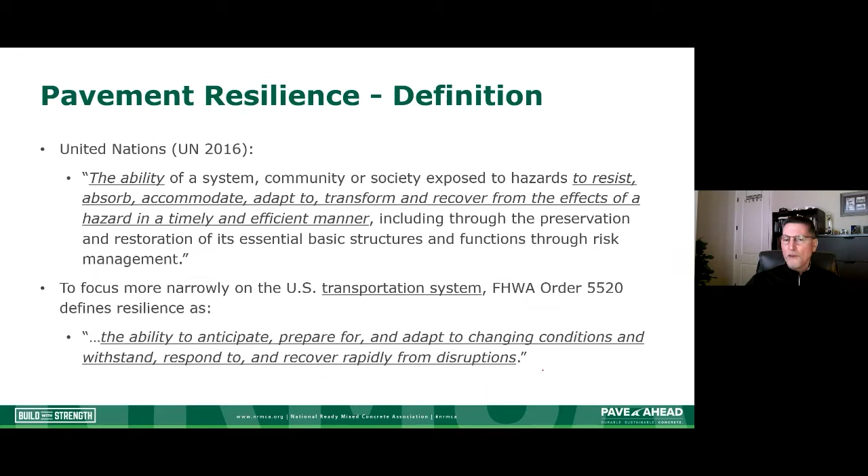So it's: you have a disaster of some sort, a hazard of some sort, and then you respond to that, and how quickly you respond really defines how resilient that asset or structure is.

So that's resilience. When we talk about sustainability, we're talking about the pavement's ability to achieve some sort of engineering goal for what it was constructed for. And hopefully what we can do is preserve and maybe even restore some of our surrounding ecosystems through the construction of that pavement, and use our financial, human, and environmental resources economically.

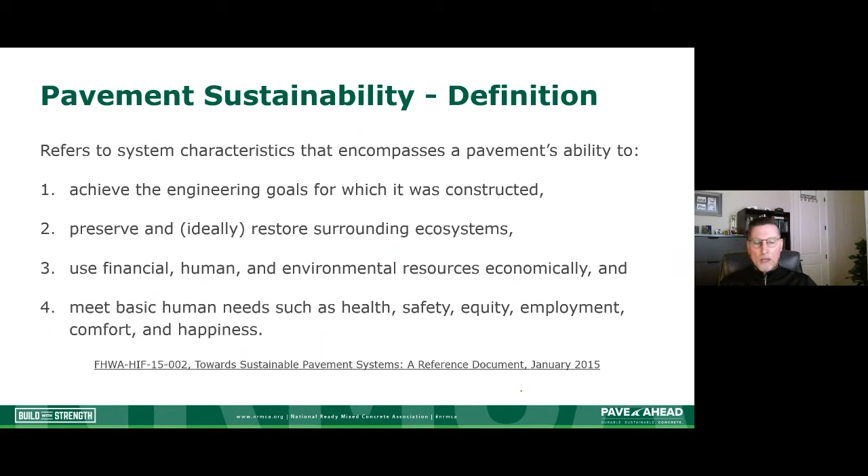That's the triple bottom line we talk about: the social, economic, and environmental. We also want to make sure we meet basic human needs such as health, safety, equity, employment, comfort, and happiness. So that's what I'm going to claim sustainability is.

Now, when we talk about sustainability, we're talking about broad impacts. We tend to think about sustainability in terms of our greenhouse gas emissions, right? So we think of it here: CO2 equivalent or carbon burden, that type of thing.

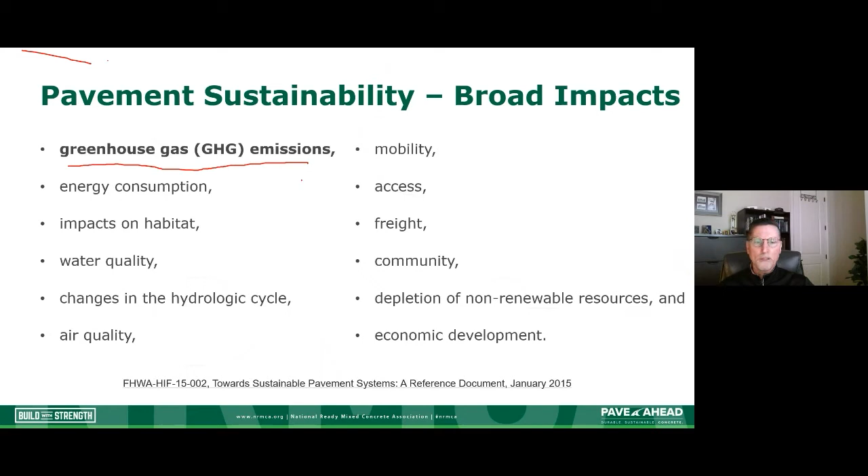What does our infrastructure, our pavement, how does that impact us environmentally? We tend to always think about greenhouse gases, but there's a lot of other things sustainability can mean: how much energy consumption, or am I saving energy in some way with that asset? Does it impact habitat and water quality, or that hydrologic cycle of rain absorption, evaporation, that type of thing? Am I impacting air quality or community mobility by adding a pavement or a lane? That access to the rest of the community, how we move freight — all of that can also be an impact when we talk about sustainability. So just keep that in mind as we go through.

Now, the one thing I want to make clear is that sustainability and resiliency are not the same thing. They can be compatible, but they're not necessarily equal. And what does that mean? Well, remember resilience is that ability to respond to some sort of a hazard or a natural disaster.

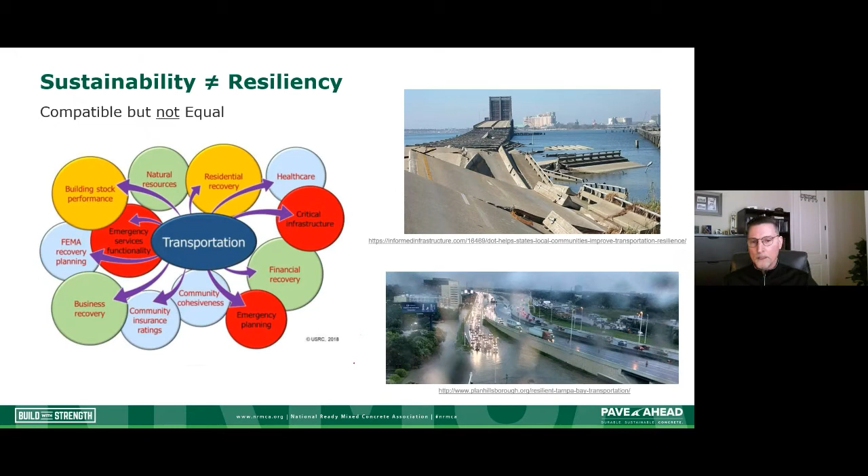We can build a pavement that is very resilient, but it may not necessarily be very sustainable. So we need to understand that sustainability and resiliency can kind of co-live together. But just because we build something sustainably does not mean it's resilient, and vice versa. When we build something resilient, it's not necessarily sustainable. So those two things are different, can be different. They can be compatible with one another, but one doesn't mean the other is going to occur.

So let's talk about resilience a little bit, get a little bit deeper into what it means, but also when we're talking about how do we design and construct resilient pavements. Resilience is that ability to anticipate, prepare for, and adapt, and then withstand, respond, and recover. So if we have some sort of an event that occurs, we will lose performance.

We'll lose the ability for that asset, for that infrastructure, for that pavement to perform adequately. So there will be some sort of a recovery time, and then we'll kind of be back either near or at or near our performance, or maybe even above our performance prior to...

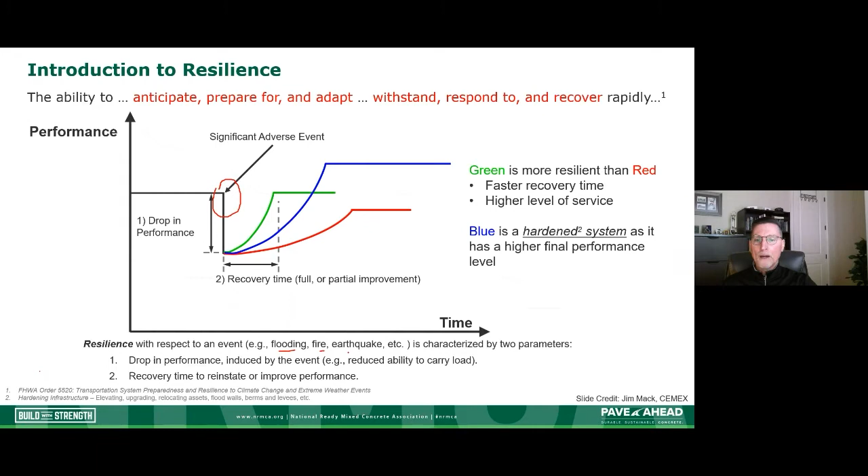The green shows, well, we in fact recovered quickly and we're at that same performance. Now, we can actually build structures to where they will rapidly recover, and maybe even by what we do during that recovery period, they may be even better in terms of performance than they were before. And when we talk about an event, what we're talking about is something like flooding, maybe wildfire, earthquake, that type of thing.

So when we're talking about impacts to pavement, climate impacts, what do those impacts entail? That can entail temperatures. What we're seeing with climate change is higher average temperature, higher extreme maximum temperatures, warmer extreme minimum temperatures. So we're not getting as cold, as severe cold. And then maybe more freeze-thaw events, particularly in areas where we tend to see significant winters. What we may see is more freeze-thaw events that occur in those regions.

When we look at precipitation, we may have higher than average precipitation over time, maybe wetter winters, drier summers, low summer humidity, and more extreme rainfall and flooding. We talk about extreme events like droughts, floods, wildfires.

What can that do? Well, it can affect subgrade moisture, particularly when we talk about droughts. We can have a decrease. What we may see with flooding is a more frequent roadway inundation. So they're flooded, the substructure of our pavements is flooded.

And then with fires, we may see more in terms of frequency, and also larger in terms of size wildfires. We've seen that here the last few years. And then we also can maybe have sea level rise, where we see more frequent roadway inundation as well.

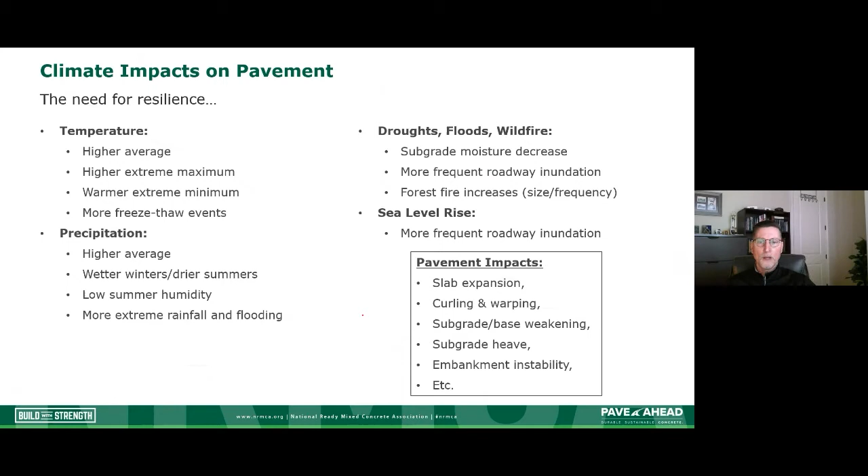When we're talking about pavements, the most significant impacts to our pavements, whether they're roadways or airports or intermodal facilities, whatever, we typically are seeing that flooding is our most significant risk to our pavements. Things like tornadoes and wind, drought, heat, wildfires, while they may have some sort of an impact to the pavement, really when we talk about operating cost and the funding gap that we have in terms of keeping our infrastructure at a certain level of performance, flooding really is the big issue, the biggest risk.

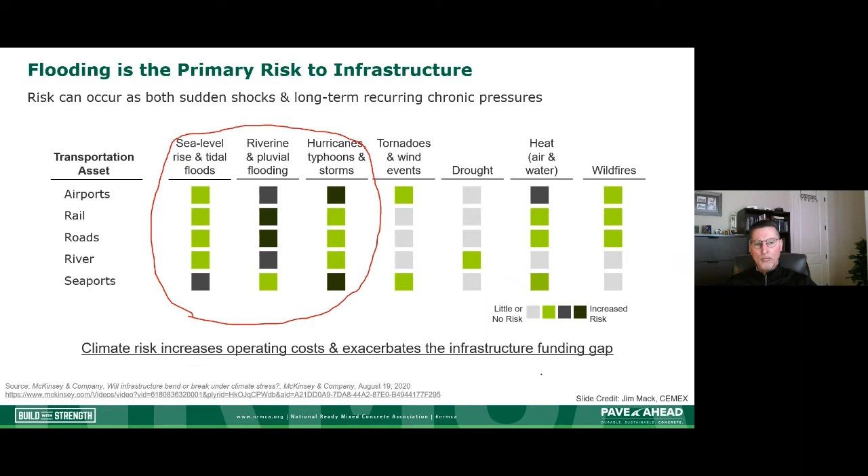And there's three different types of flooding. The first would be severe flooding from natural disasters. Think of our eastern coast, think of the Gulf Coast, and particularly Houston. Houston, over the last several years, has had several significant flooding events, the worst being Hurricane Harvey. So we have hurricanes, we get tidal rise, we get significant rain, and we have flooding that can occur, and our pavements can be flooded and inundated for a very, very long time.

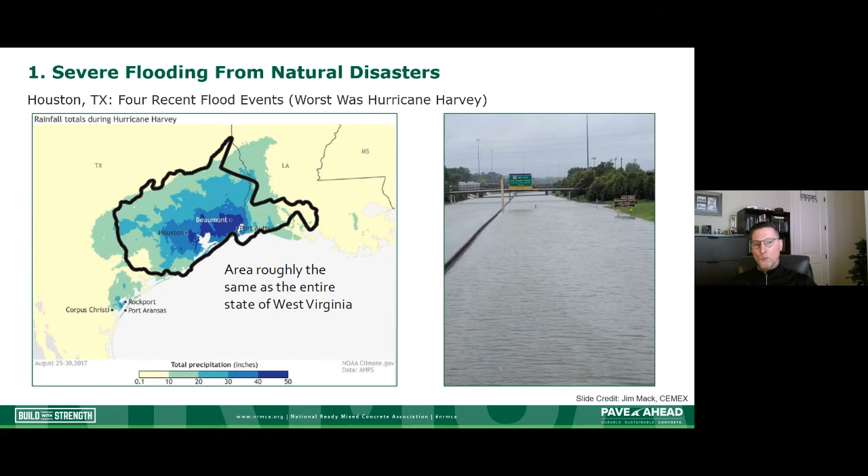Sometimes it can be weeks. And when we have that, we have a reduction in strength of our pavement, typically below the surface. Another way flooding can occur is in the Plains States. We may see significant river flooding going over the embankments during the snow melt, the springtime. So we can have significant flooding.

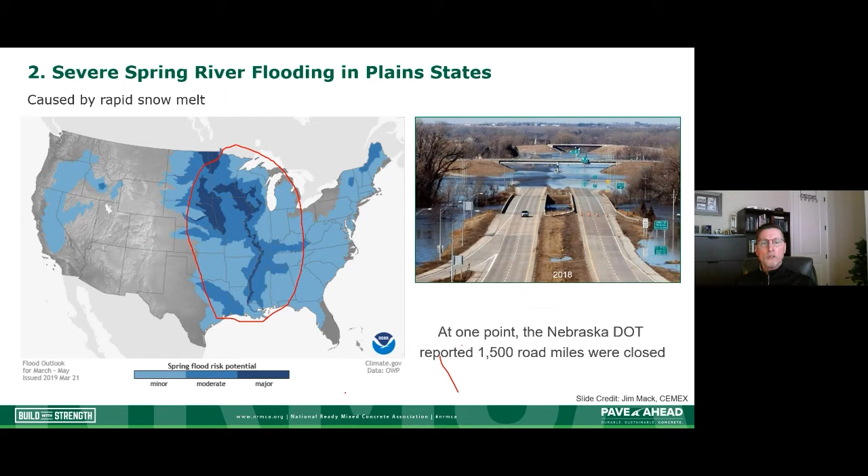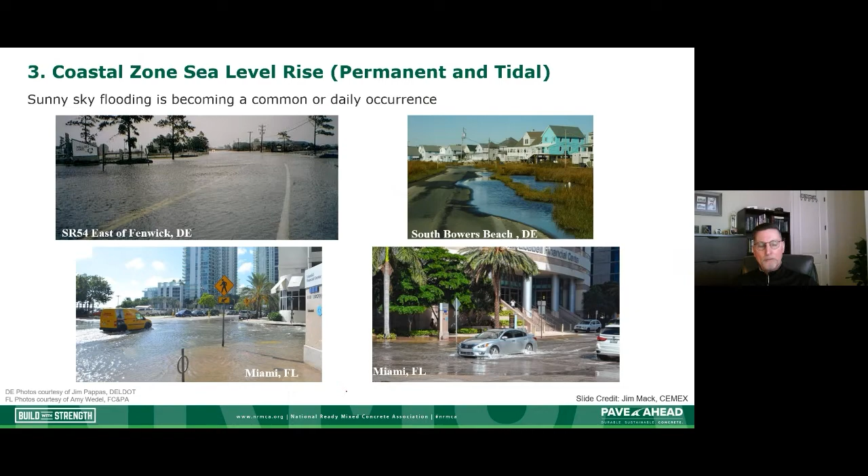We tend to see that in these Plains States, where we get overtopping of our river banks, we get significant flooding, and we'll see portions of our roadways flooded for a very long time. Then in our coastal zones, with sea level rise—whether it's a permanent rise or more frequently now, tidal rises, so daily changes in tide—it can actually flood streets. We see that a lot in Delaware, Florida, and a lot of these coastal cities. We'll see this tidal sea level rise that occurs throughout the day, and that inundation of the pavement can cause us problems.

So we talked about inundation a little bit. There are actually two different types of flooding that can occur. The first one is what we call washout, where you get a really rapid flow of water, very high current, and that basically scours away the material below the pavement and eventually into the pavement, and the surface is washed away. The pavement type, whether it's flexible or rigid, really has no impact on the ability to resist scour. It's just going to happen. Not much we can do about it in terms of pavement type.

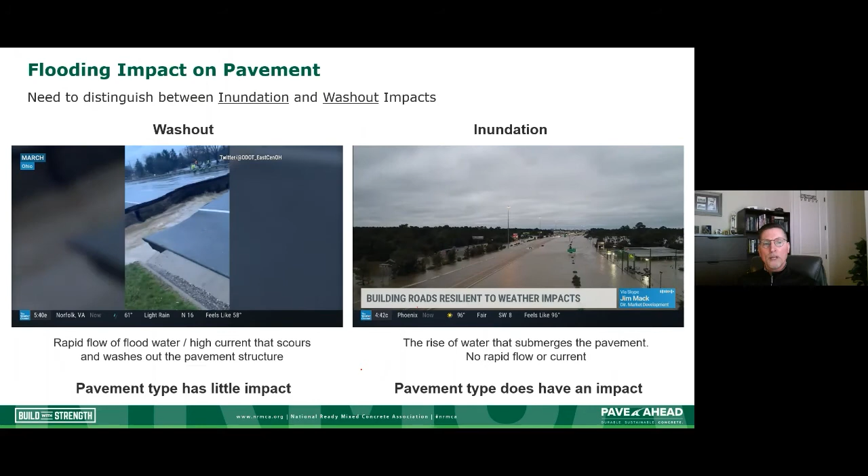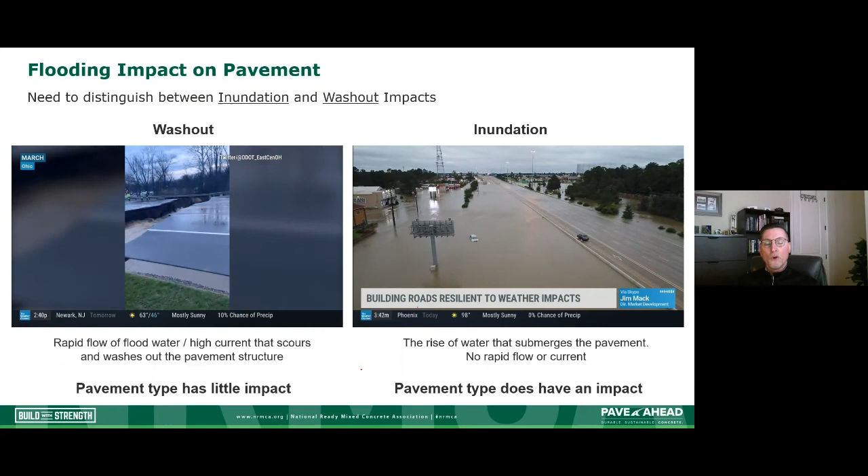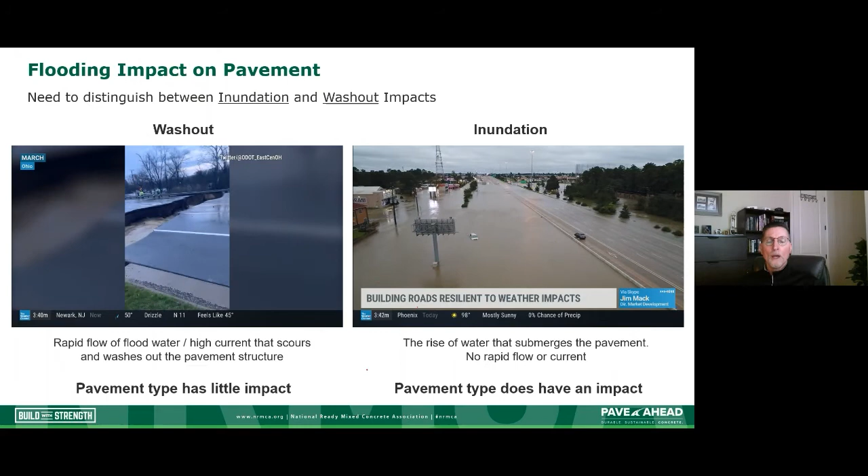Where pavement type really does make an impact is when we're talking about inundation. Several states, counties, and cities have looked at the difference between the ability of a flexible pavement, a typical asphalt pavement over granular material, to recover from and perform adequately after inundation versus a rigid pavement. We see a big difference between flexible and rigid pavements. Rigid pavements tend to recover quicker, and we don't see as significant a loss of performance with concrete pavements.

So that's a little bit about resilience, and we'll talk in just a minute about some of the things we do to design and incorporate sustainability into our designs. We'll also talk about incorporating resilience into our designs, in just a moment.

So resilience we've talked about. Let's talk about sustainability a little bit. What's important about sustainability is not necessarily that we can design for it—that is important—but the other part is we need to be able to report how sustainable our infrastructure is. The way that we report, and also the way we assess whether we're doing a better job in terms of sustainability and environmental impacts, we need to be able to report that adequately and then determine how much better we are doing. So let's talk about that a little bit.

When we talk about sustainability, there are two things to keep in mind: embodied carbon and operational carbon. This is the impact we're going to have with our infrastructure, with our pavement. When we're talking about embodied carbon, that means the release of CO2 or some other impact—whether it's release of methane, an impact on our rivers and streams, air quality, or whatever environmental impact we're looking at—when we are creating that asset: when we're manufacturing, when we're transporting raw materials to our manufacturing infrastructure, and when we're transporting that material to construct that asset. That's what we call embodied carbon.

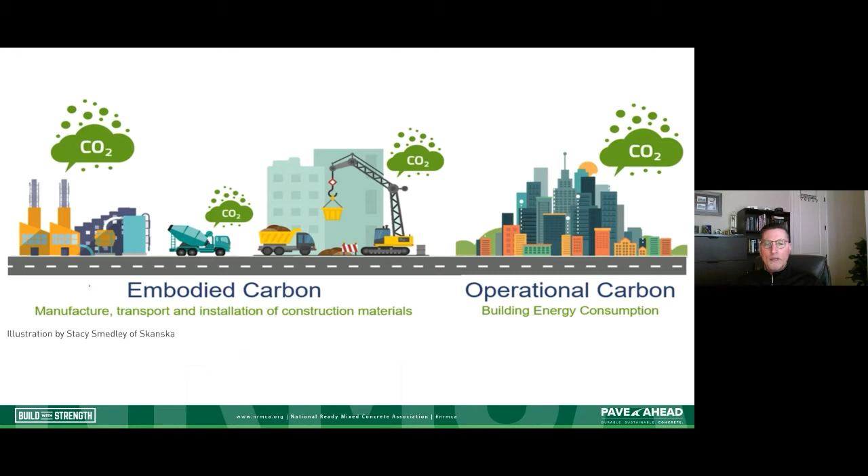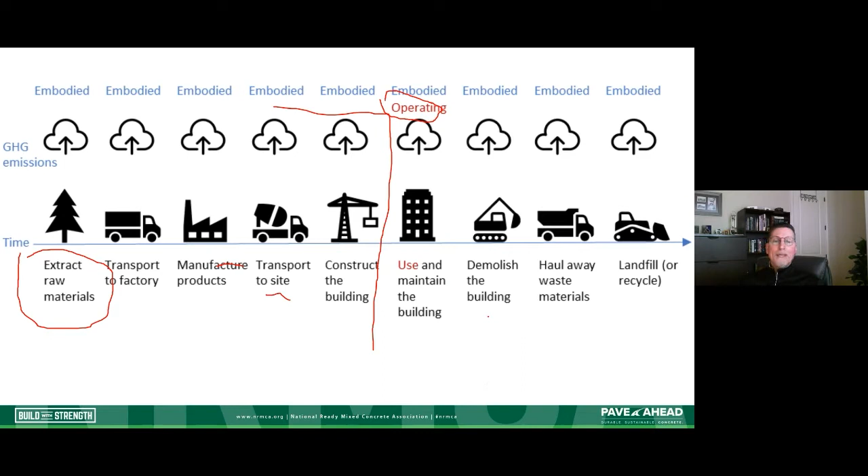So what might that look like for a pavement or a building? We start with extracting raw materials, and when we do that, we have some sort of greenhouse gas emission. Then we have to transport that material to the factory, manufacture it, transport it to the construction site, and construct it—all of that is embodied carbon. When we use our building or pavement, that's our operational carbon, but there's also embodied carbon allocated in the use phase. And then at the end of the life of that infrastructure, we demolish it, haul it away, and take it to a landfill—again, that has embodied carbon as well. So it's important to understand those two things when we're talking about environmental burden or impact.

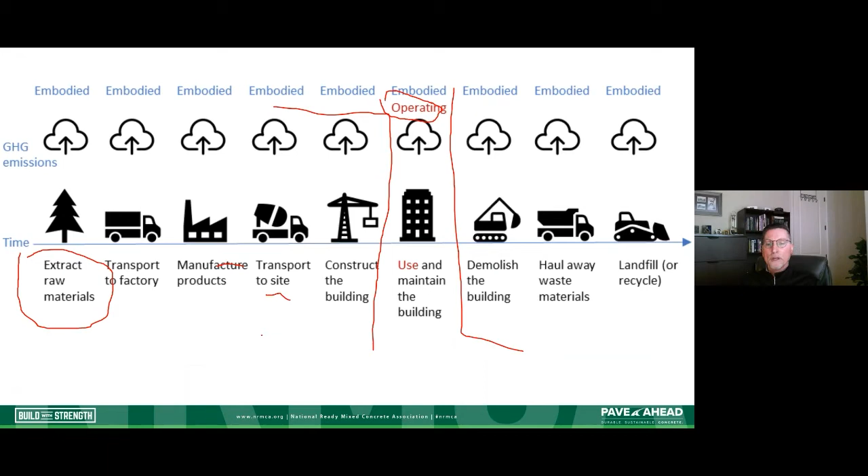Now, when we are talking about sustainability, there's a couple of different things we can do. This is kind of that reporting portion I was talking about. One is we can simply disclose to somebody—a buyer, an owner, or a government, whatever the case may be—what our environmental impact is. The other is we want to be able to look at our infrastructure and compare different types of materials and say, all right, this one does a better job in terms of environmental impact than this material does, or this pavement structure does. So that would be comparing.

We utilize what we call environmental product declarations to do that disclosure. Basically what that means is that owner, that buyer, wants to look across the board when they build that infrastructure: what is my environmental impact going to be? And I can ask each person that manufactures for that pavement, for that building, to disclose to me what that environmental burden is.

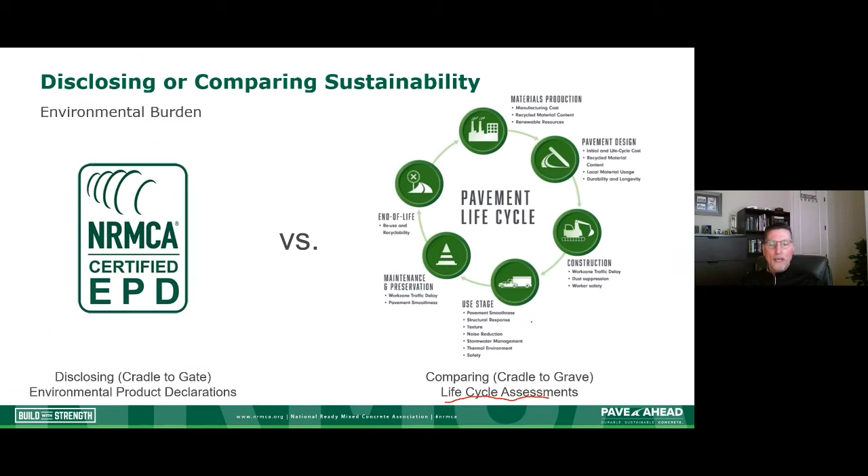When we actually want to make decisions, we have to do what's called a life cycle assessment, and that incorporates the entire life cycle. When we're disclosing, that can mean we're only taking and disclosing a certain portion of our environmental impact, and I'll show that on the graphic here in just a minute. But when we actually want to compare and make a decision on which material is better, that's when we use the full life cycle assessment. That's called cradle to grave.

So when we are doing a material disclosure and an environmental product declaration, what we're typically looking at is just cradle to gate. And that kind of looks like a food label. On a food label, it tells you all my vitamins and minerals, and also what my impacts are in terms of fats and sugars and things like that. An environmental product declaration, or EPD, would do basically the same thing. It's going to tell you the energy required to make that material, and what those operational impacts are. So we get an operational and an environmental impact that's reported out. And again, that's from cradle to gate.

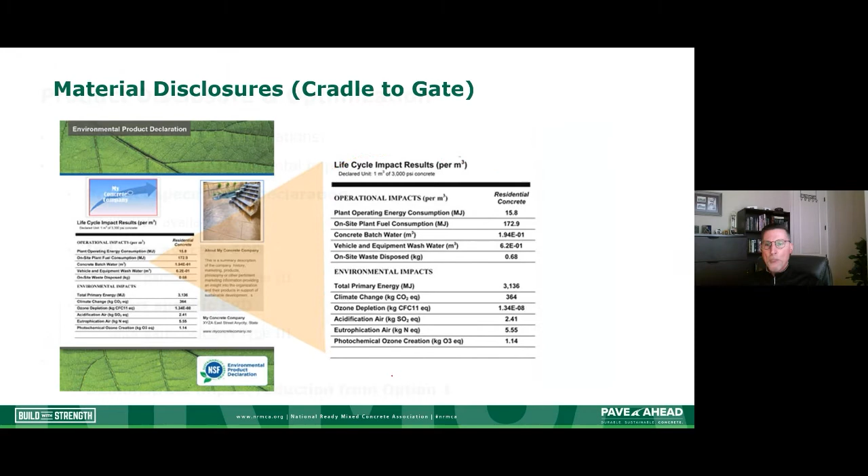So we can use those EPDs in a few different ways, and how well those things are verified is what gives us the validity of that EPD. So what does that mean? Well, there's a couple of different ways we can develop an EPD: option 1 and option 2.

In option 1, we can report 3 different ways. One way is for the manufacturer of that material to just self-declare and say, all right, this is my environmental impact. Nobody checks his numbers, nobody does any kind of validity check, nobody really looks at and verifies whether things are correct. It's just somebody stating it, and that owner must take their word for it.

We can go to the next level, where what we may do is say, all right, if I'm going to produce concrete to build a pavement, I can look at all the different concretes I might use—3,500 PSI with straight cement, or 3,500 PSI with maybe 70% cement and 30% fly ash, okay? I can report that, get all of that data, work the numbers, have somebody verify it. And we can generate EPDs called an industry average for each of those performance levels—that 3,500 with different types of materials, and a 4,000 with different types of cements and materials. I can use that to report to an owner. So that's a next level better.

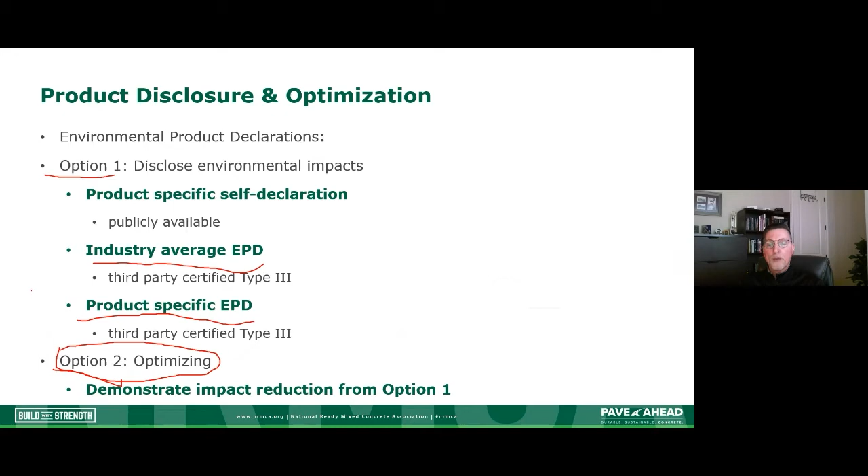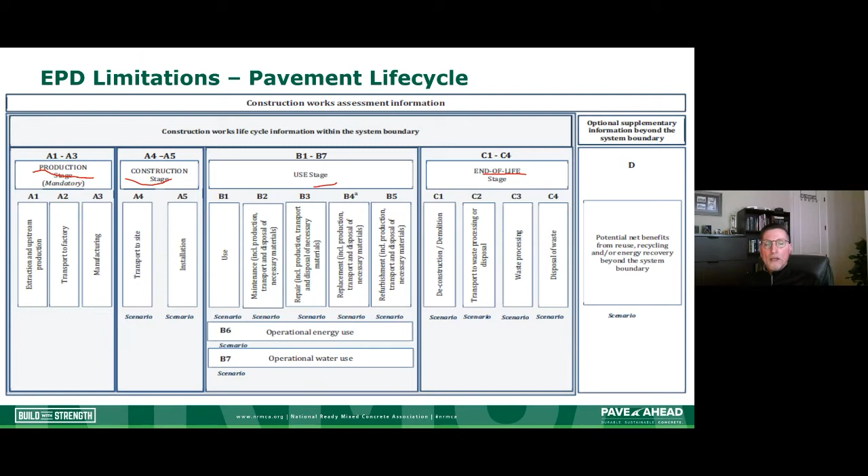When we talk about cradle to gate, we're talking about the location at which we stop our accounting of environmental impact. We have our production stage, construction stage, use, and end of life. An EPD typically just covers this portion, the cradle to the gate. Cradle being pulling that material we need from the ground. So we're extracting our resources, manufacturing it, and getting it as far as the construction site.

All this other stuff we're not accounting for in terms of our environmental impact. It's just that early portion of the manufacturing stage.

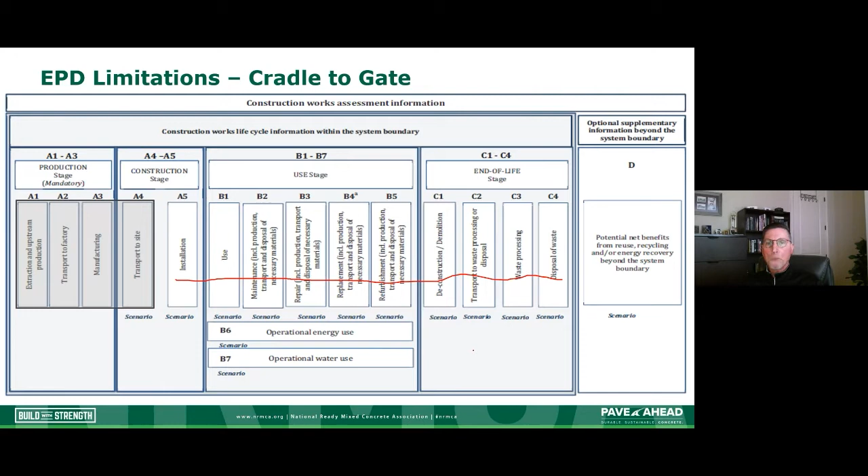So if we want to incorporate all those other stages, the construction, the use phase, the end of life phase, we have to incorporate what we call life cycle thinking. We know this already because we do this in the pavement arena in our life cycle cost analyses. Simply, life cycle thinking is to reduce a product's resource use and emissions to the environment, as well as improve its socioeconomic performance through its life cycle, from extraction of raw materials all the way through to the end of its use.

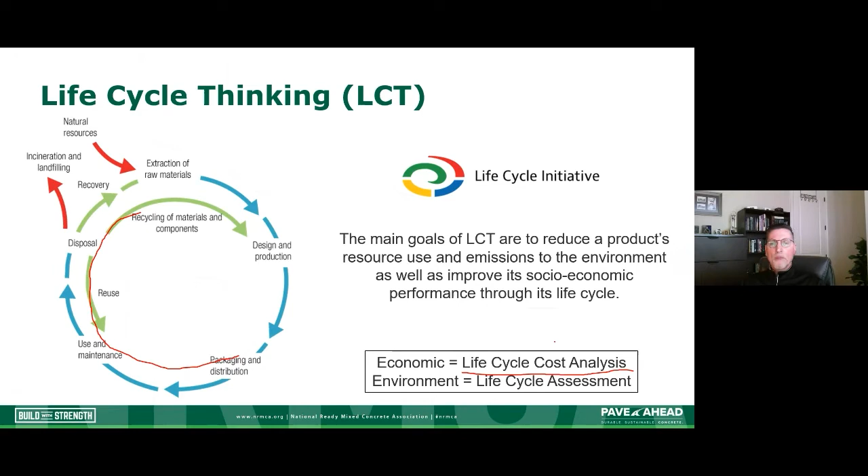And again, we do that a lot with life cycle cost analysis. We look at things like our initial cost, what it costs us to maintain it and rehab it, what it costs our users when we're using that pavement, and what is our residual value of that pavement at the end of its life. So we do that in life cycle cost analysis and evaluate our economic considerations. It's an accounting - we're doing financial accounting there.

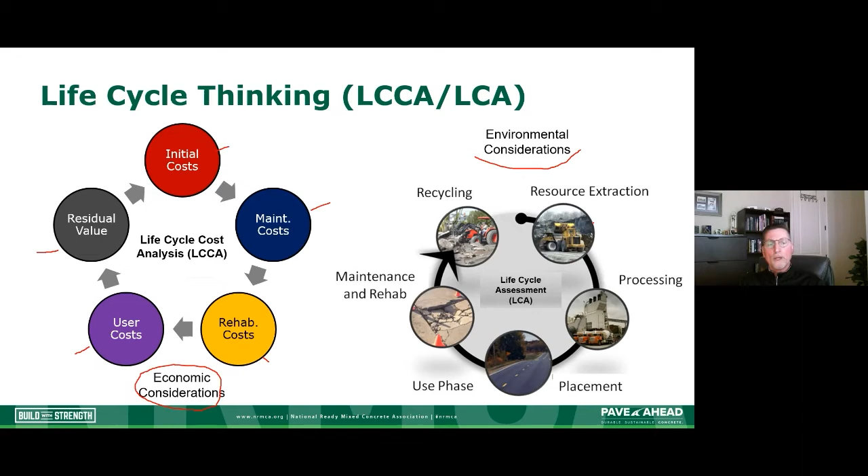Same type of thing when we do environmental considerations. Basically, all we're doing is accounting for that environmental impact at resource extraction, processing, placement, use, maintenance and rehab, and at the end of life, what do we do with that asset or structure? Do we recycle it? Do we leave it in place? What's the benefit if there is a benefit at the end? So instead of accounting financially, what we're doing is accounting for our environmental impact, typically greenhouse gas emissions.

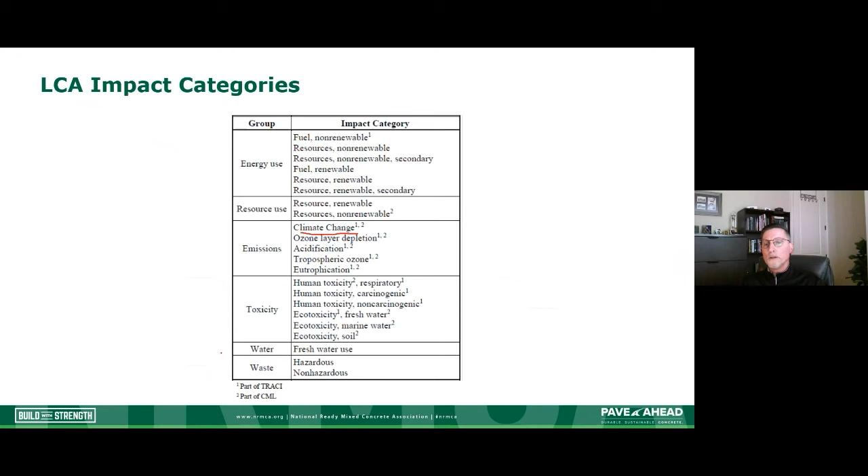But there are a lot of other impact categories we can look at. What is our energy used to manufacture and use that asset? Resource use. What's the toxicity to my environment by building and using that asset? So just like with the EPDs, we're reporting typically our greenhouse gas emissions. We do that same thing in terms of our life cycle assessments, but we have to understand there are a lot of other impacts we can actually report.

The next thing to think about when making decisions, using that life cycle assessment to make a decision - the question is, within that process of building our asset, when do we make a decision about what's best in terms of environmental impact? Do we do that in the pre-design stage, the design stage, during procurement, construction, or the use phase? It's important to recognize we're going to make a decision based on our environmental impact at a certain point in our construction process or in building that asset.

Typically, when we do life cycle cost analysis, we do those during the design stage, and we can do a life cycle assessment at the design stage as well. We just have to understand we can make those decisions at different times within that whole procurement process - the pre-design, design, the actual procurement and contracting, constructing, and using. We have the opportunity to do those life cycle assessments at all these different points.

The other thing that's also important to understand is what criteria are we going to use, who does the analysis, and can we really compare results? Because that becomes important - many times if we do an LCA that has different boundary conditions, we can't compare LCAs of differing types of materials.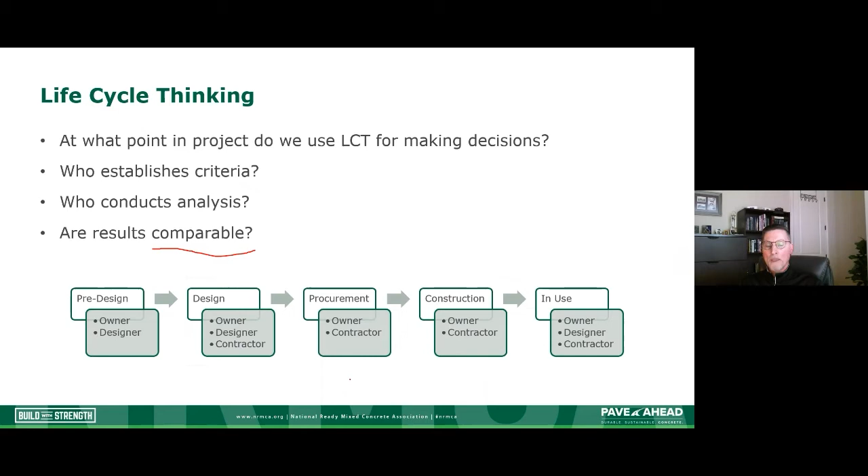If our boundary conditions are different in terms of our manufacturing, for example between concrete and something else, then we cannot really make a decision about which one is better in terms of its environmental impact, because we're comparing apples to oranges, not apples to apples or oranges to oranges. So it's important to understand what those boundary conditions are and whether or not they're the same for those materials, and whether we can compare.

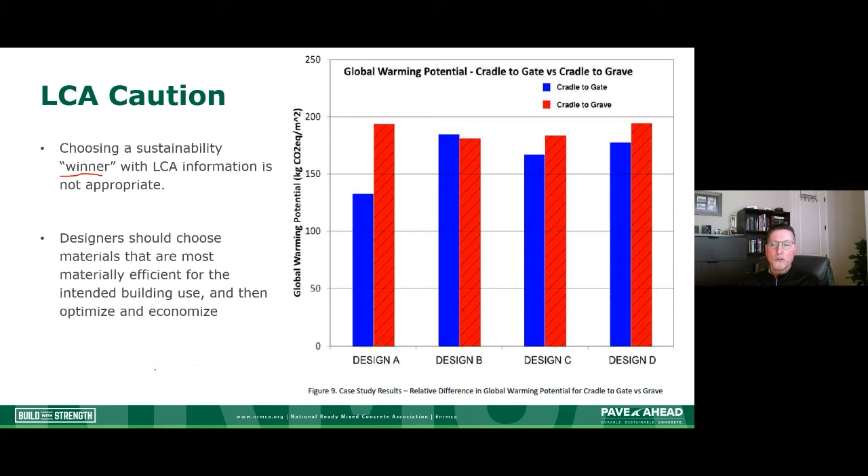So we see that here. Many times what we want to do is choose a sustainability winner, right? What we want to say is design A wins over design B, C, or D. That's not really the best way to utilize either an EPD or an LCA. What we typically want to do is choose the material that we're going to use because it's the most materially efficient, and then optimize and economize that design so that we are reducing the environmental impact of that material. So it's difficult to make material choices utilizing an EPD and an LCA.

So that's an overview of resilience and sustainability. Let's talk a little bit about how we can utilize materials and designs and asset management in terms of incorporating green elements. We know that we can utilize low impact materials to achieve some of our sustainability goals and some of our resiliency goals. There's many ways that we can do that, and I'll just touch on a few.

One would be utilizing something called Portland limestone cement. We know that cement and the manufacture of cement has an impact on our environment. It's a fairly intensive CO2 manufacturing material. If we can reduce the impact by utilizing a Portland limestone cement, then that's a great option for us. That's a blended cement that has additional limestone content, and it's optimized for whatever performance it's going to be used for.

It's a really easy way to reduce your carbon footprint by about 10%. It can be used in buildings, bridges, pavements, geotechnical applications like stabilization of soils and things like that. PLCs are readily available throughout the US and Canada, so you can get them from your cement suppliers fairly easily.

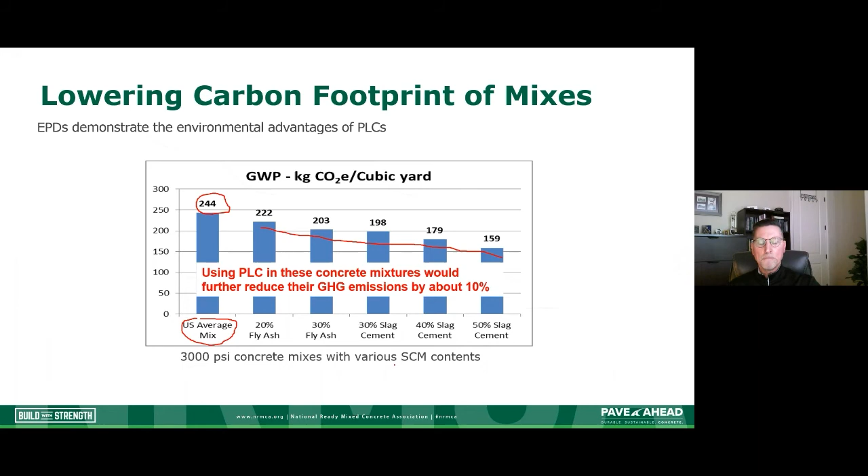And we can demonstrate this. If we were to look at several different concretes, for example one just being an average 3000 PSI concrete, straight cement, nothing else, no fly ash or slag in it, we would see our global warming potential of about this. If we use some fly ash, we can see it go down a little bit. If we use some more slag, we can see it go down even more. If we were to take and utilize a Portland limestone cement in lieu of just the Portland cement, we would get about another 10% additional decrease at each one of these levels. So PLCs are a great way to be able to lower impacts in our concrete for either pavements or for buildings.

Another thing that we can do is use a different type of cement, one where we are utilizing the benefits of what's called carbonation. So one thing we can do in terms of manufacturing is change the way that we manufacture our cement a little bit by adding CO2 actually into our manufacturing process. When we inject CO2 into that cement manufacturing process, we can actually cause that CO2 to chemically react, and it allows us to use less limestone in our manufacture of cement.

We can use lower kiln temperatures in the manufacture of our cement, so we produce about 30% less greenhouse gases. So we're actually taking captured carbon and utilizing that in our manufacture of cement.

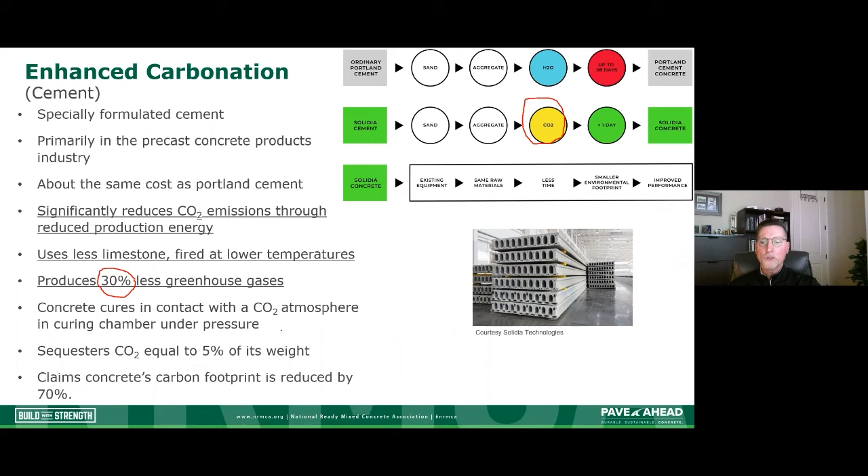We can do the same thing in the manufacture of some of our aggregates. We can take captured carbon from some other industrial manufacturing, and we can inject that or sequester that into some aggregates. So we can sequester CO2 by changing the aggregate, if you will. It's another way in which we can lower our impact, by using captured carbon in our aggregate development.

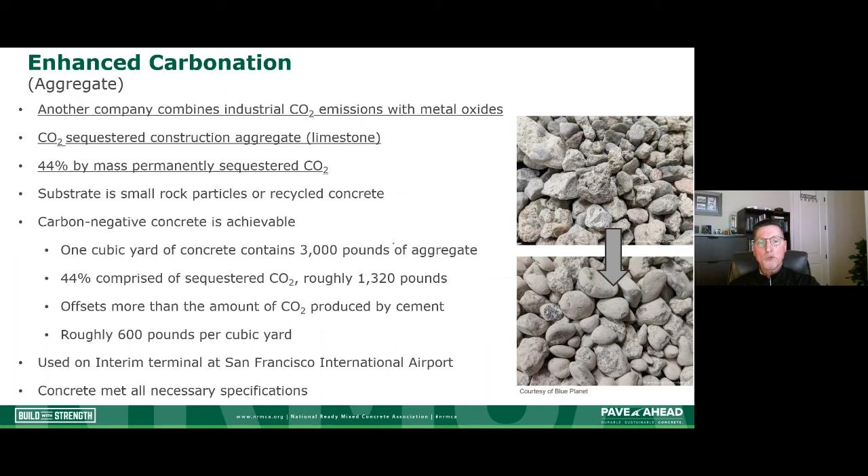And then another one that we can do is right during the midst of our concrete manufacturing. So at a ready mix plant, we can actually inject CO2 into that manufacturing process, and it creates an artificial limestone as it goes through a reaction.

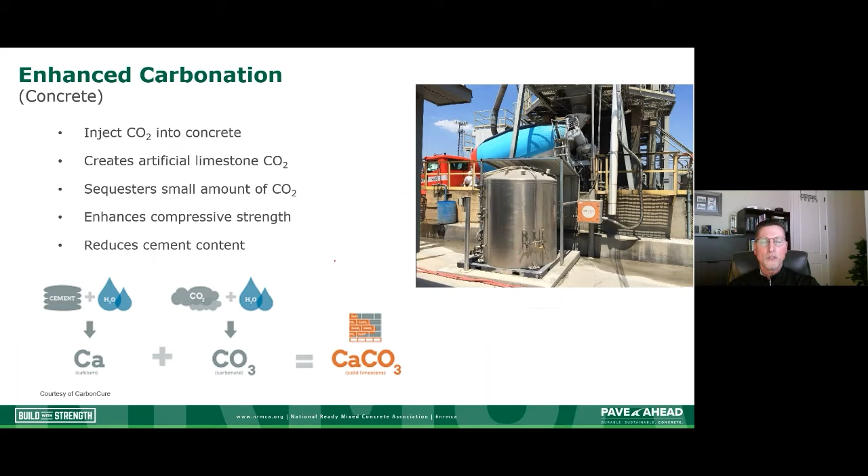As you're mixing your cement, your water, your aggregates, you inject CO2, and it sequesters that CO2 within the concrete. It enhances the compressive strength a little bit, and it also reduces the cement content. So there are significant benefits through this enhanced carbonation, or injection of CO2 at different points into the concrete manufacturing process.

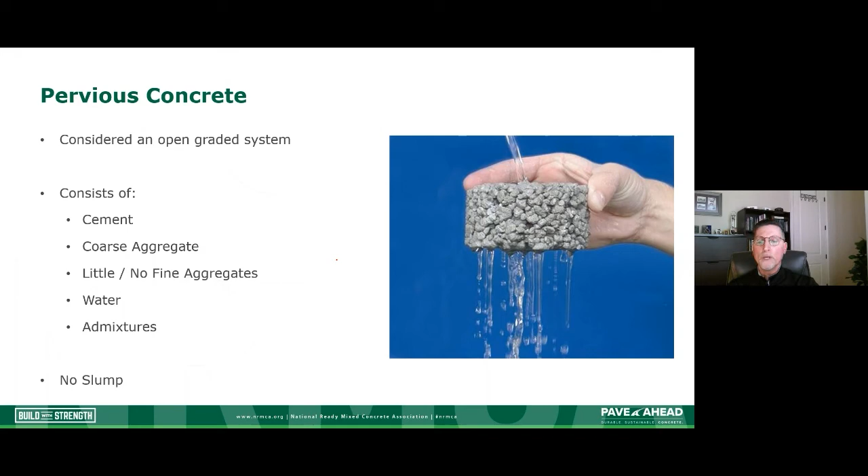And then, of course, most people know about pervious concrete. This is what we'd consider a sustainable material because it's an open graded system and allows water to flow through it. When we allow water to flow through it as runoff from rain, it actually kind of cleans that water before it hits the water table. We're reducing our total suspended solids, reducing metals like zinc and iron, and also nutrients from runoff that comes from fertilizers. We're capturing and retaining all of that, so by the time the water hits the water table, it's clean.

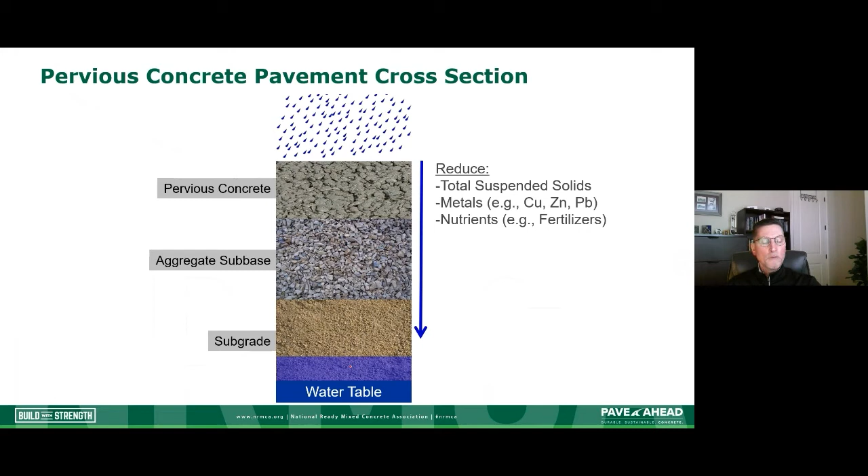So there are a lot of different ways in which we can impact our pavements in terms of environmental impact, just by using low impact materials. We can also use recycled materials and things like that. So there's a lot of ways that we can impact our environmental burden. Let's talk about things we might do to lower the environmental impact during the design stage, and also how we might improve resilience.

One way that we can do that is just changing the way that we do pavement design. Eric did a great job taking us through pavementdesigner.org, giving us an overview of how we might do a pavement design.

And typically what we do in pavement design now is this: we start out with our climate, our soil conditions, our traffic, our concrete strength, and evaluate that against some performance target. The performance targets Eric was talking about were fatigue life, erosion, and faulting. So we look at a set of pavement layers and thicknesses and analyze whether or not it meets our performance requirements - like 15% slabs cracked, or being below half an inch of faulting. We go through an iteration process to tell us how thick our pavement needs to be.

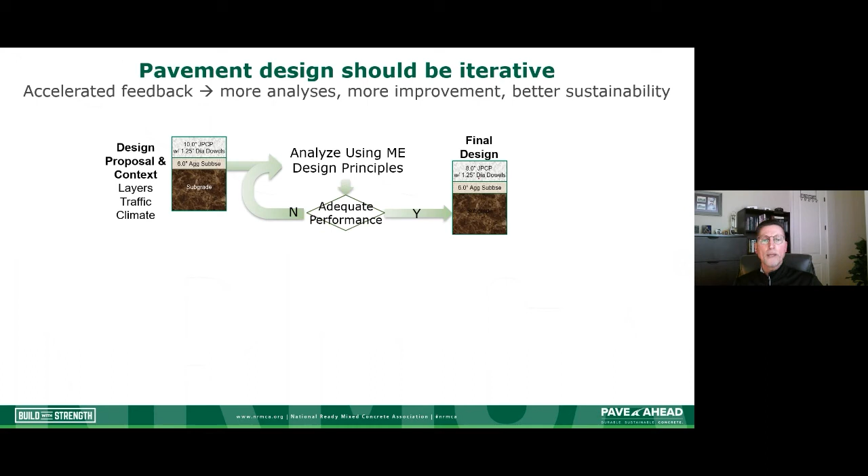Once we do that, we develop what's called these life cycle bill of activities - that's all the cost data and environmental data we need to do our life cycle cost analysis and our life cycle assessment. So we're basically doing this LCCA and LCA once. We do the iteration to make sure we get the right cross-section, but we only evaluate its life cycle impacts once.

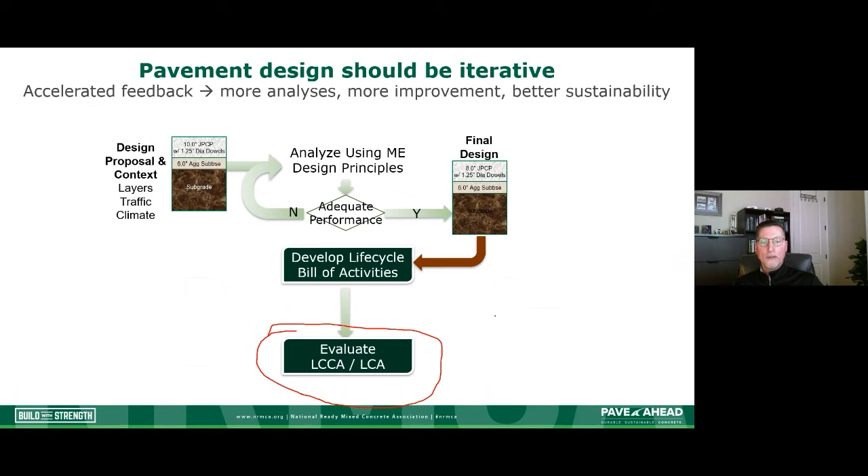We can actually change that process to where we incorporate the LCCA and LCA in optimizing our pavement design for economics and for environmental impacts. So what we would do is start out with some inputs, evaluate those inputs, develop those life cycle bill of activities, apply all of our cost and environmental data, and then evaluate it in terms of our life cycle cost criteria and our life cycle assessment, our environmental criteria.

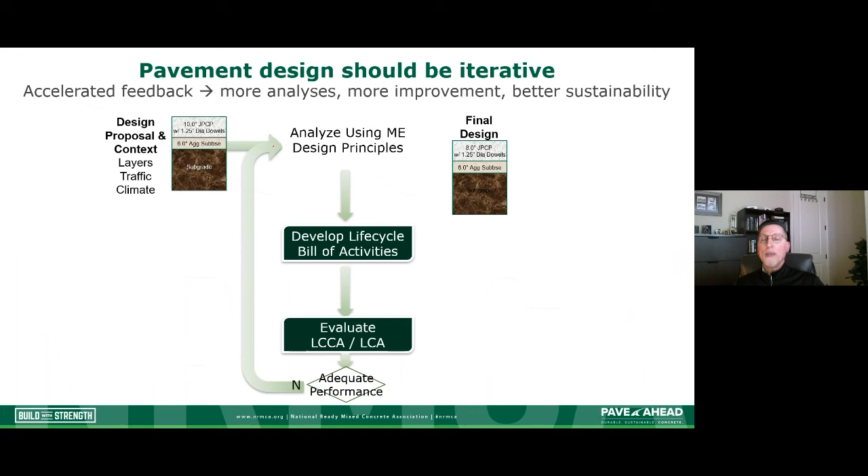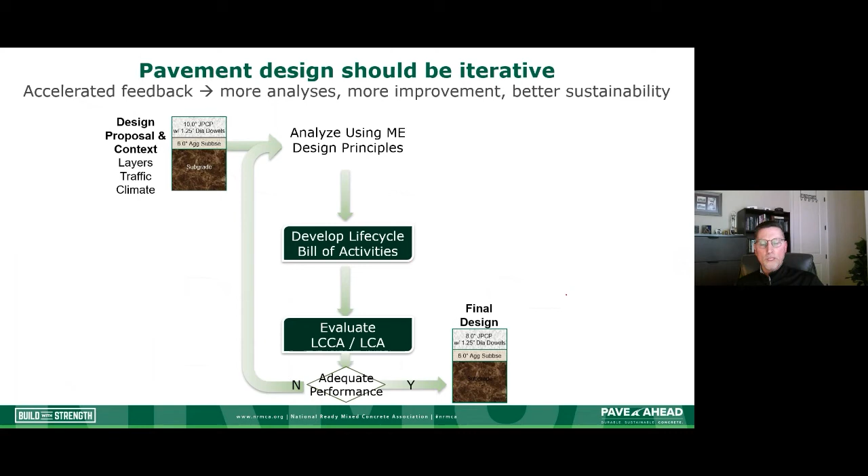So we establish those criteria and ask, does it meet that performance or not? If it doesn't, we go back up and change our pavement structure and maybe the materials we use, until we can finally iterate on what would be our most economic and most environmentally impactful pavement design. So if we change that methodology a little bit, we can be more impactful in the design stage and make sure we're reducing our burden both economically and environmentally.

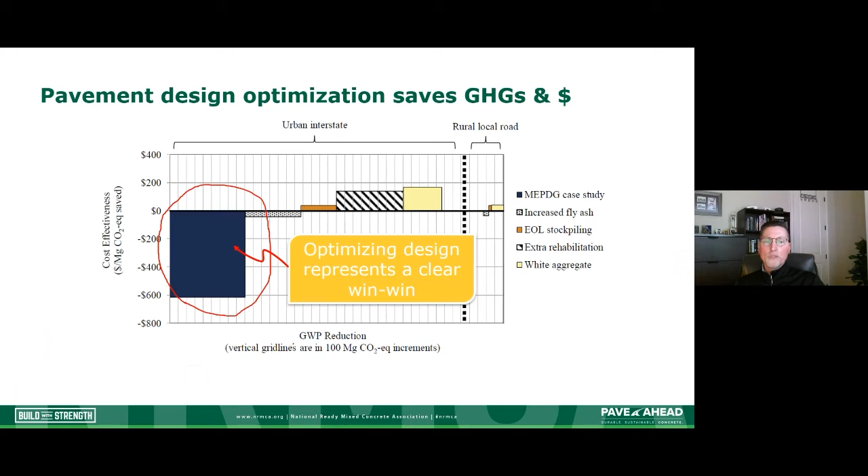So if we do that, what we find is that, let's say we just did a couple of things - maybe we used recycled materials, or we just went from 2 rehabilitation cycles to 3 rehabilitation cycles - we wouldn't have a really significant impact in our environmental burden. But if we optimize using that process I just showed, it shows we could potentially have very, very significant environmental and economic burden reduction. So this represents a real clear win-win situation if we change just that methodology a little bit.

One thing I talked about was that washout versus inundation, and what research has been showing is that simply by adopting a hard, stiff surface - i.e. concrete - we can produce more resilient and potentially more sustainable pavement cross sections.

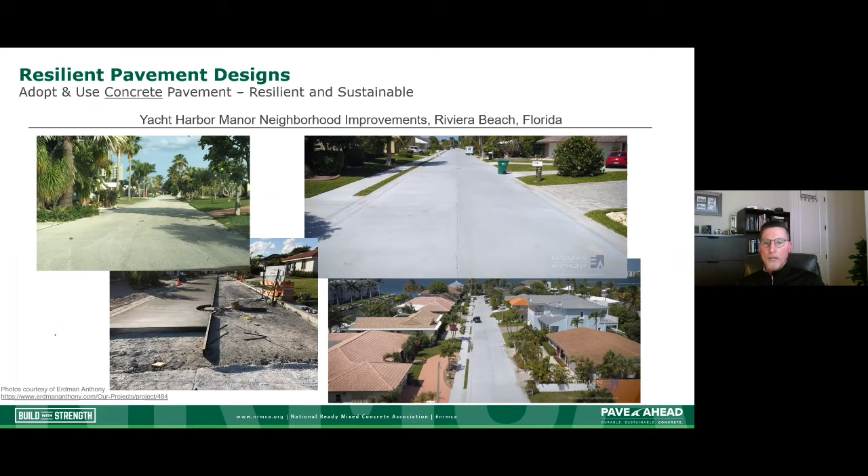One city that has applied all of that knowledge is Riviera Beach in Florida. They're one of these that tends to have a lot of coastal flooding that can occur from either hurricanes or tidal changes. They went through a very significant rebuild of some of their sewer and water utilities, and they went from an asphalt surface road to a concrete surface road because they were finding that their concrete surface roads and other portions of their city were actually performing much better, even when they got flooded. So if we can simply start by using concrete, that helps in terms of resiliency and potentially sustainability.

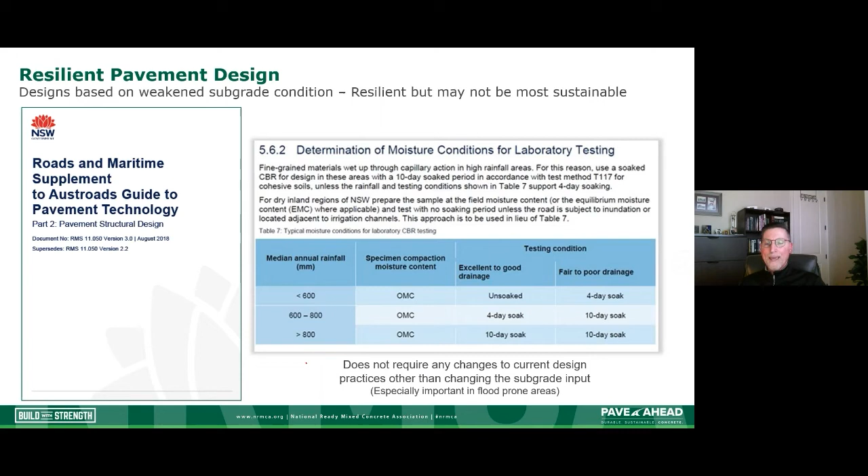Now, in terms of designing for resilience, one of the things that we can also do is base our designs on the weakest subgrade condition. Think about a subgrade when it is completely saturated, with a significant amount of water and moisture in it. Generally, if it's a clay subgrade or silt subgrade, we'll see very significant loss in strength. So if we simply design for a very weak subgrade, we can help make that pavement cross-section more resilient. It may not necessarily be the most sustainable pavement design because it may require more materials, so you might have to do a little more optimization to make it sustainable as well, even if we are making it more resilient. So this is a case in which we can make something more resilient, but not necessarily more sustainable.

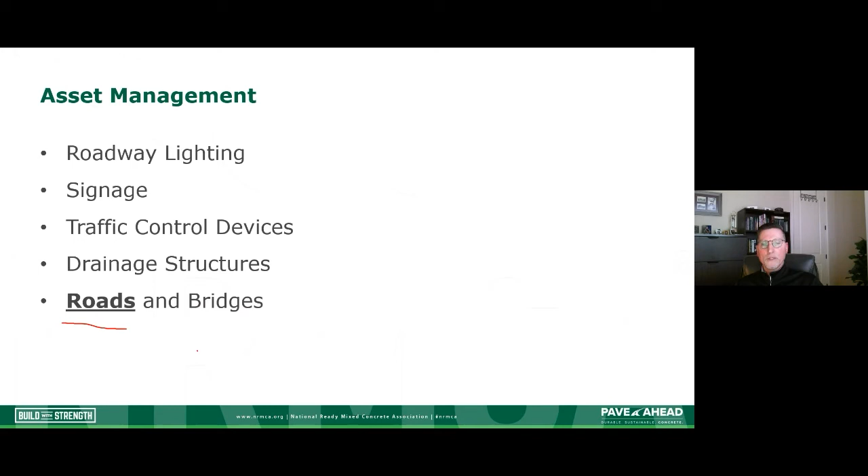All right, so that's the design phase where we can impact sustainable or resilient. Let's look at the asset management stage, or what we would call the use stage, or maybe the maintenance and rehabilitation stage - a lot of different ways that we can talk about it. In terms of asset management, what we do is over time take snapshots of how well that infrastructure is performing, whether it's lighting, signage, traffic control devices, drainage structures, roads, bridges, whatever the case may be. What we're really interested in is how we can impact things from a roads standpoint during our asset management decision-making stages.

So when we're talking about pavements, asset management is really what we capture in terms of our pavement management systems. What we do is gather a bunch of data about our pavement structures: the thickness, how well they're performing, how long they've been there, the maintenance and rehab cycles that we have performed. We capture all of that data, and then we segment it based on our network, and we get a current state of the network, and we can produce reports, performance histories and things like that. So all of that data in our pavement management system can then help us decide what the maintenance and rehabilitation strategies are that I need to apply to my network to make it economical and sustainable.

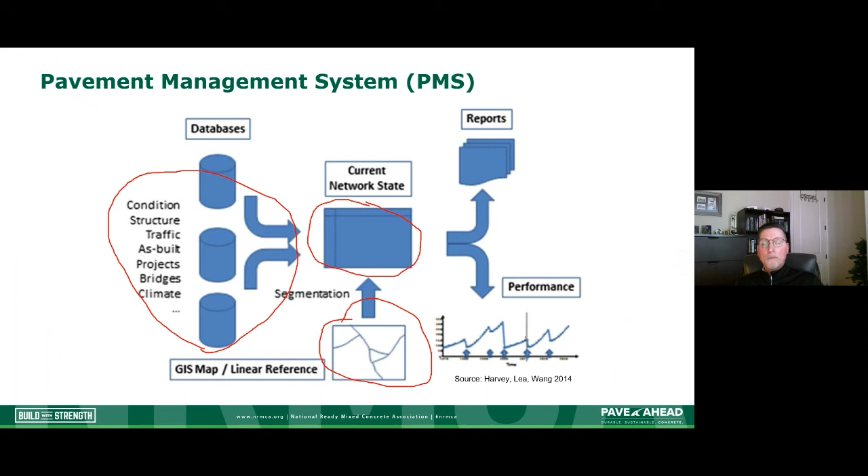Essentially what we do is take all of that data that we've gathered, evaluate it, and predict what our performance is going to be going forward. Then we make decisions about the best treatments that I can apply to my pavement so it'll perform adequately over time, and we optimize that. Is an overlay the best idea? Is crack sealing the best idea? Is concrete pavement rehabilitation through grinding the best idea? So we select the treatments and determine when those things need to be applied.

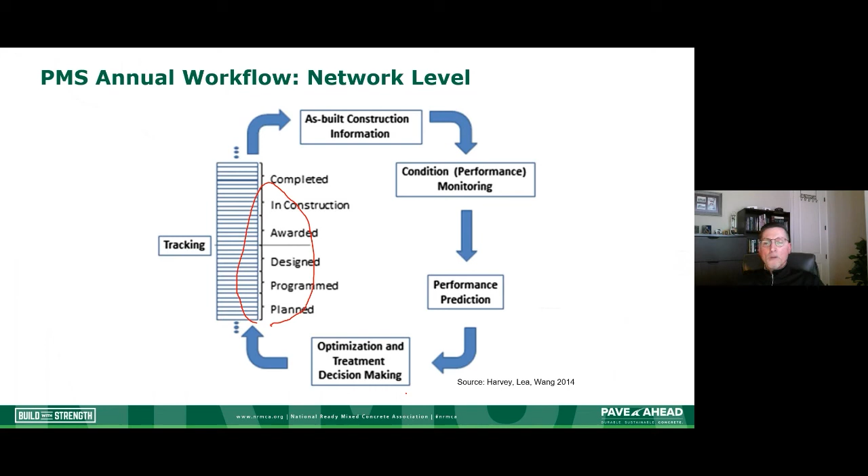Now, how can we make that more sustainable? What we can do is perform LCAs during that decision-making phase. So when we're trying to decide what's the best maintenance or rehabilitation technique, we can then incorporate those life cycle thoughts about the materials and what the environmental impact would be in that decision-making stage.

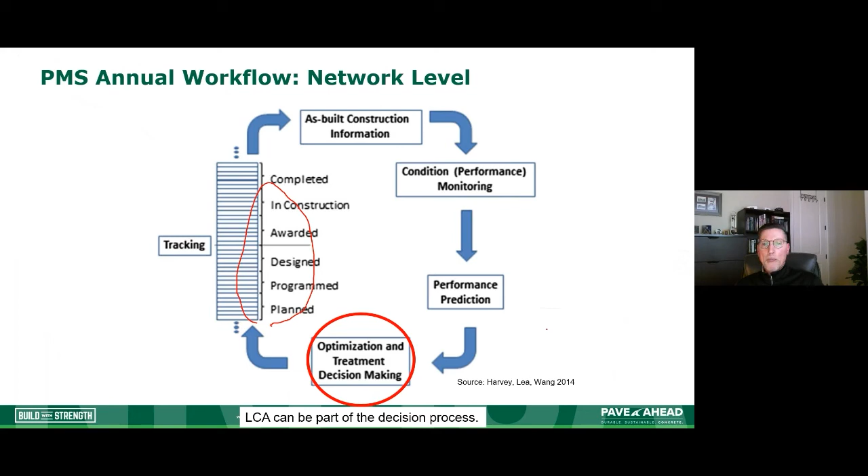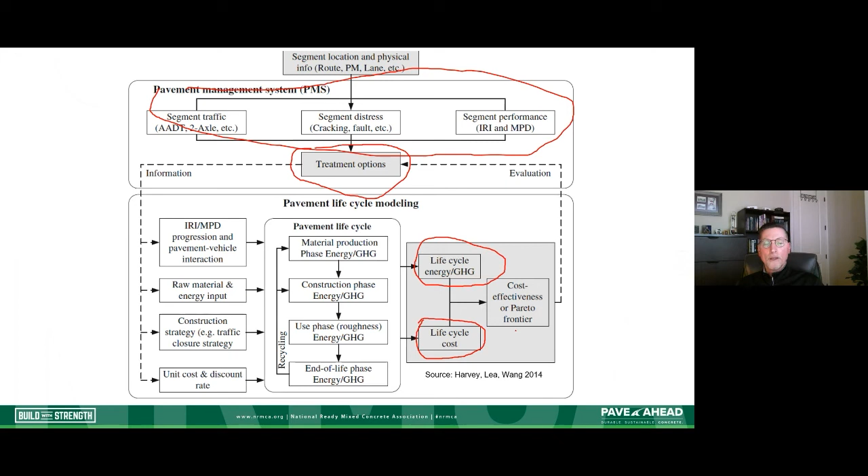So what might that look like? Here again is our pavement management system, and we're going to evaluate certain treatments based on what our pavement management system tells us. So what we would do is conduct that LCA for each treatment, and it would tell us what our greenhouse gas emissions would be. We can get a full accounting of what our life cycle would be on the environmental side, and we can also do a full accounting of what our life cycle cost would be on the economic side. Then we can make a decision about what the best treatments are and when, based upon optimizing for the environment and for our economic considerations.

Other things that we can do during that use phase, we talked about all these different types of treatments. Well, we can apply things like concrete overlays. They can be sustainable, and they can also help us on the resiliency side.

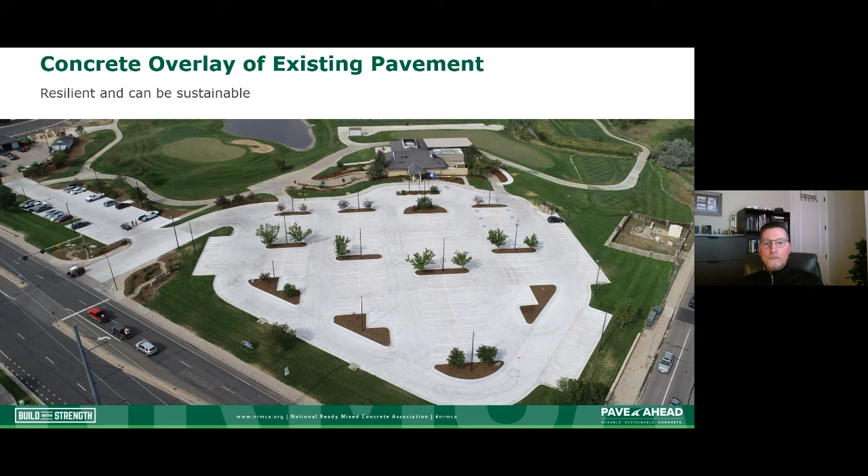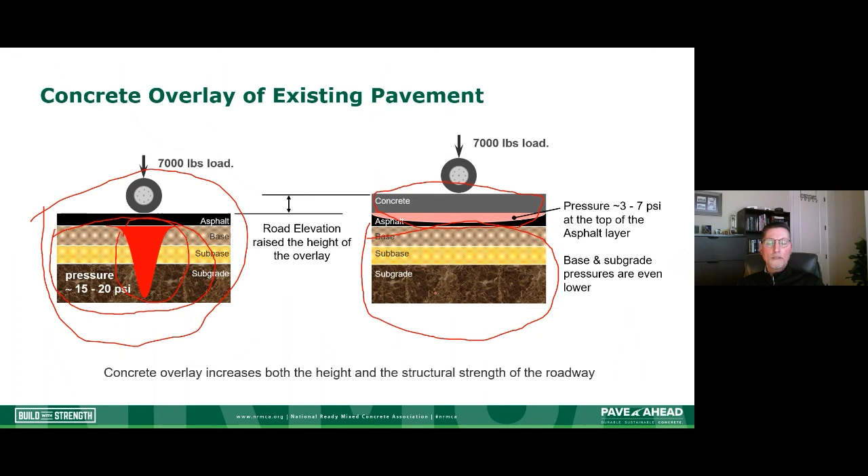So concrete overlays are great because they can be sustainable and they can be resilient. We'll talk about concrete overlays in just a minute, but basically all you're doing with overlays is preparing that surface, cleaning it, putting the concrete right on top of it, texturing it, curing it, and then jointing it. A very simple process that we'll get into more detail on in the next segment.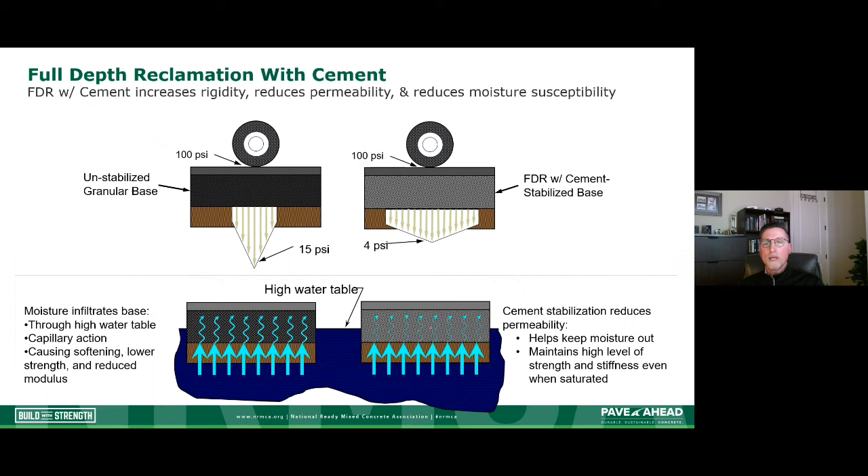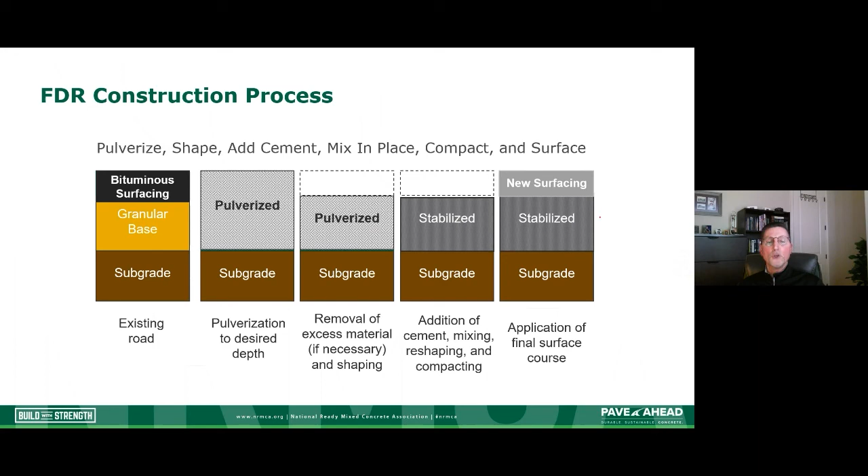And again, all we're doing here is taking the existing asphalt pavement and granular base, pulverizing it, adding some sort of stabilizer to it, and then putting a new surface on top of it. So again, that's something that can be done during the use phase, the rehab phase.

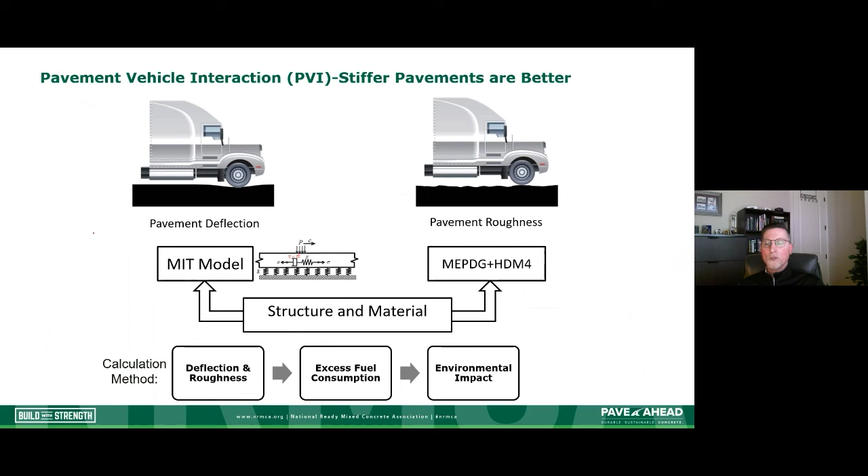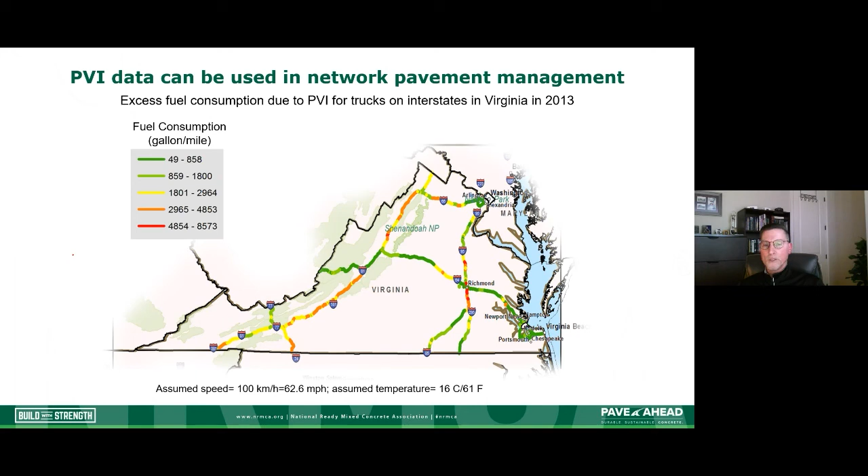And then the very last thing that we'll talk about is when we do make our pavement stiffer, we actually reduce pavement deflection and pavement roughness. When we reduce deflection and make things smoother, when we actually traverse the pavement, we can use less fuel, and if we use less fuel, we can have a lower environmental impact. So using stiffer materials can help us, and that can help us not just on a single project, but if we apply that over our entire network, we can lower our environmental burden as well, and potentially also be more resilient.

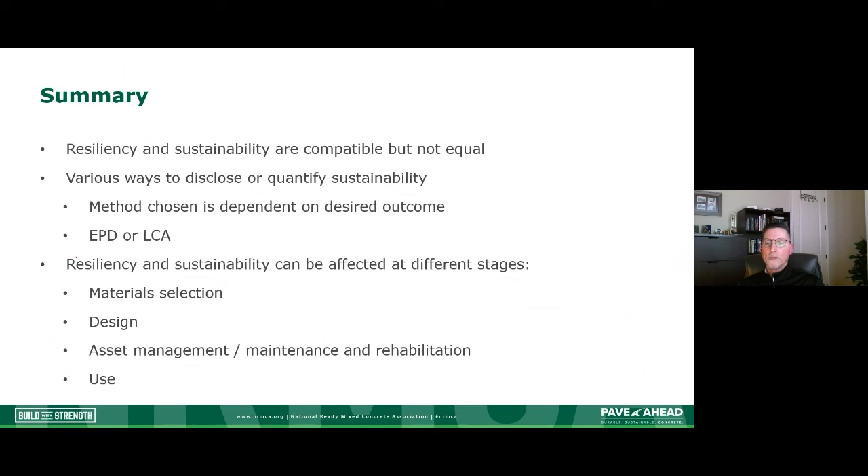So in summary, we talked about resiliency and sustainability being good. They're compatible generally, but not always equal. We can disclose or quantify sustainability in different ways. And then we can also become more resilient and sustainable at different stages within our life cycle.